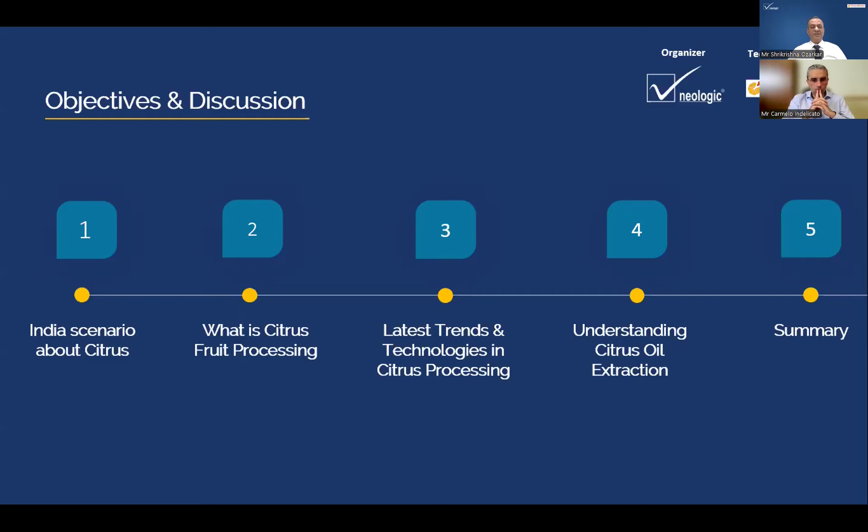So let's have an overview of the types and growing areas in India.

The typical Mandarin orange, technically known as Citrus reticulata, is the most common citrus fruit grown in India. It is generally known as Santra in India and is native to Southeast Asia. It is a rounded, usually thorny evergreen shrub or small tree that can grow up to 15 to 25 feet tall and produces fruits up to 3.5 or 4 inches in diameter, resembling an orange.

Sweet orange, also generally called Mosambi, is another typical type of citrus fruit. Oranges are known to be sweeter than other varieties, Kinnow has a more sour taste, while Mosambi has a mild sweet taste in nature.

This citrus orange occupies around 40% of the total area under citrus cultivation in India. The most important species are the mandarin, Citrus reticulata; sweet orange or Mosambi, Citrus sinensis; and acid lime, Citrus aurantifolia. These share around 41%, 23%, and 23% respectively of all the fruit produced in the country.

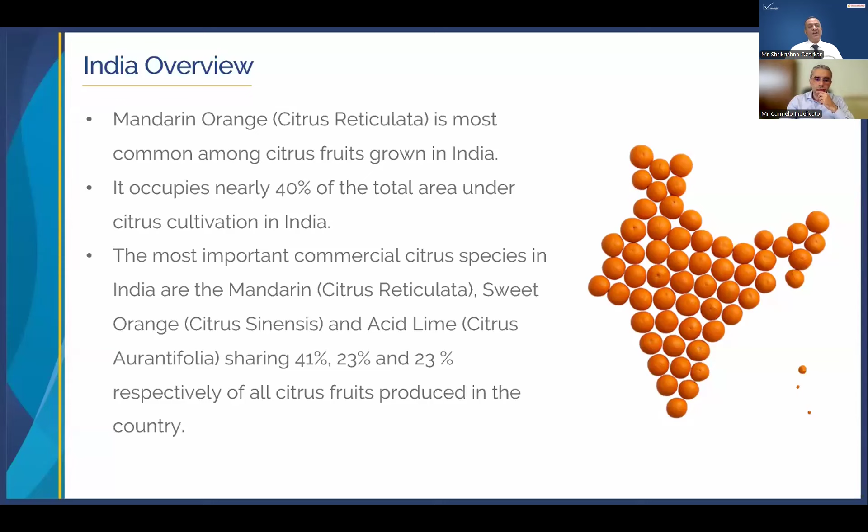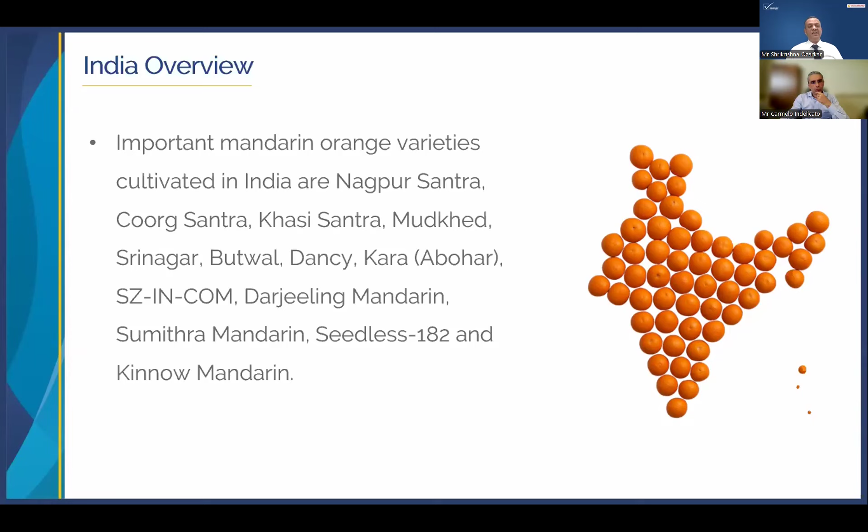The important Mandarin orange varieties cultivated in India include Nagpur orange or Nagpur Santra, the most famous variety in India, Coorg Santra, Khasi Santra, Mudkhed, Srinagar, Butwal, Dancy, Kara from the Abohar, Punjab area, and SZ-IN-COM, a typical variety developed by NHB, the National Horticulture Board, known for its improved plant growth, yield, and fruit quality. Then there's Darjeeling Mandarin, Sumithra Mandarin, and Seedless 182. These are some of the varieties typically grown in India.

Kinnow is also one of the citrus fruits grown in India. It is more largely cultivated in northern India, and Punjab holds the maximum share in Kinnow Mandarin producing area in the country. Other states include Haryana, Rajasthan, Madhya Pradesh, Himachal, and Jammu and Kashmir.

Kinnow is a high yield Mandarin hybrid, scientifically Citrus nobilis crossed with Citrus deliciosa, known as Citrus reticulata blanco. This hybrid citrus fruit offers several advantages over regular oranges. It is known for its higher calcium content, said to have 2.5 times more calcium than other citrus fruits typically found in Indian varieties, and it is good for heart health and cholesterol balance. Additionally, Kinnow is an excellent source of vitamin C and dietary fiber.

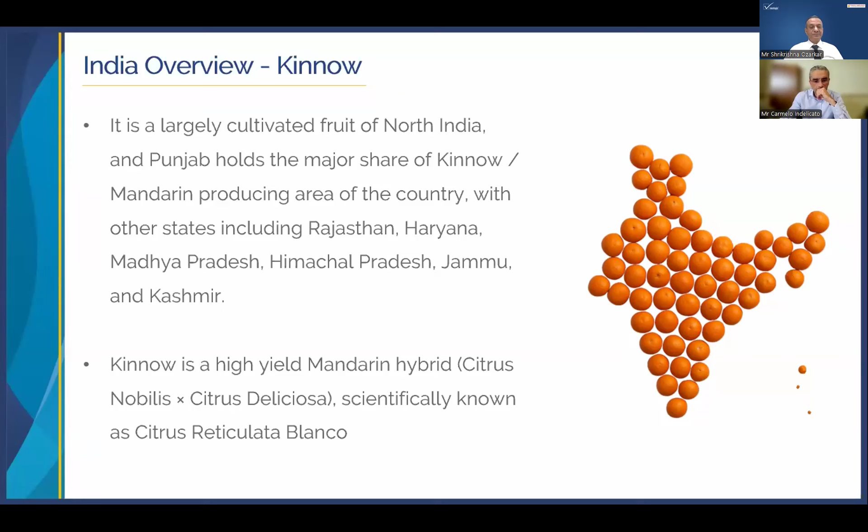You can see citrus growth all over India, but the north-eastern region is called the citrus belt of India, a very upcoming region in citrus processing, which will have a lot of fruit processing or citrus processing plants in the coming years, having a remarkable diversity in citrus species. This belt comprises Assam, Meghalaya, Arunachal Pradesh, Manipur, Nagaland, and Mizoram. This region has 52 varieties comprising 17 citrus species and 6 hybrid species.

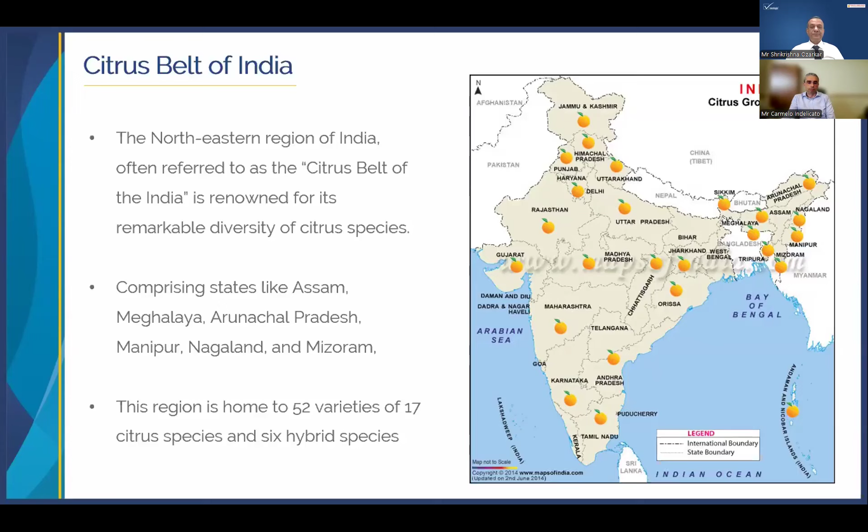This is the statewide production and productivity of citrus. This data has been taken from the National Horticultural Board and Ministry of Agriculture, Government of India, relating to 2021-22, so there will be updates in the coming years. This gives the area of plantation, production, and productivity in metric tons per hectare. Madhya Pradesh has one of the highest productivity figures, along with Telangana and Karnataka, in metric tons per hectare.

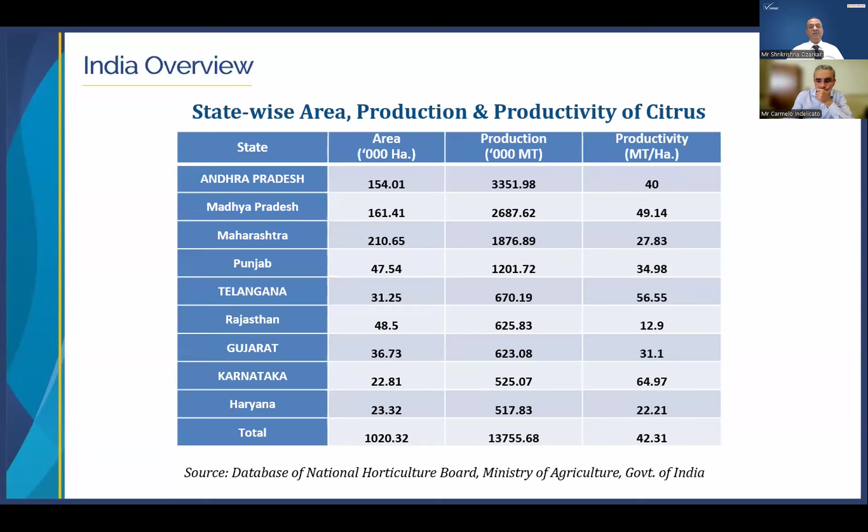These are state-wise growing belts. Like we typically say Nagpur Santra or Nagpur Orange, Maharashtra has the region of Nagpur, Akola, Amravati, and Wardha, the typical belt where most oranges are grown. In Rajasthan, we have Jhalwad and Kota. In Karnataka, we have Chikmagalur, Kodagu, Hassan, Bijapur, Gulbarga, and Bagalkot. In Madhya Pradesh, we have a couple of districts, along with Assam, Nagaland, Mizoram, Tamil Nadu, West Bengal, Orissa, and Meghalaya. And as mentioned for Kinnow, Punjab and Abohar have the maximum area where Kinnows are grown.

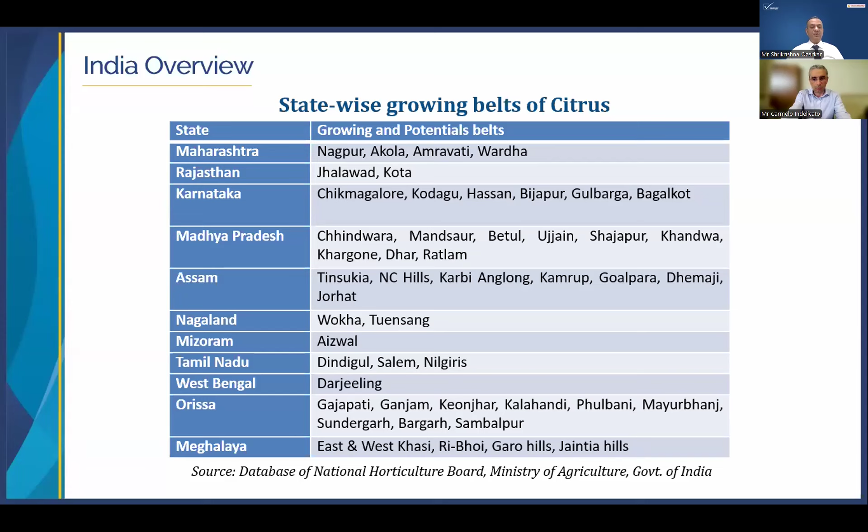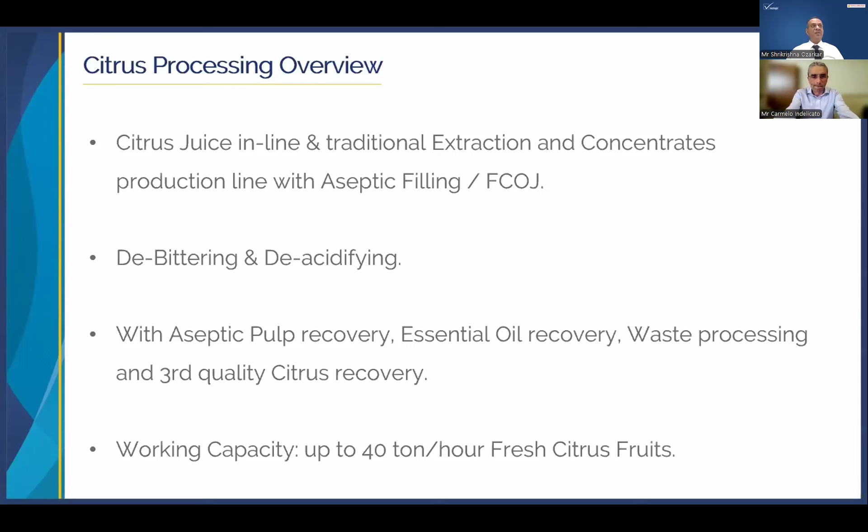So let's try to understand what citrus fruit processing is. Citrus fruit processing typically involves juice extraction followed by juice concentration. This juice concentrate can be aseptic juice, ACOJ, aseptic concentrate orange juice, or FCOJ, frozen concentrate orange juice. Then we'll understand debittering or deacidifying in citrus processing, pulp recovery, essential oil recovery, waste processing or third quality citrus recovery. We'll also understand the pulp wash system, and these systems can run up to 40 tons per hour.

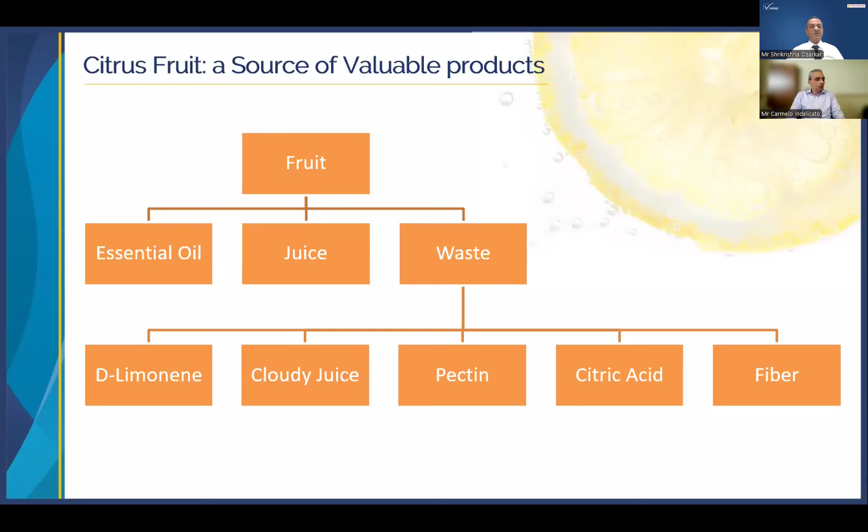The citrus fruit is a source of valuable products, such as essential oil and juice concentrate. The peel waste is also used in cosmetics, so there are many applications from the orange peel or orange peel powder. Then there's D-limonene, cloudy juice, pectin created from the fruit peels, citric acid, fiber - all these products we will be discussing again at the end.

Let's try to understand the typical process flow. We will have the fresh citrus receiving and storing. Storing because the receiving of citrus may be continuous or not, and we should have a buffer in order to feed and run the machines continuously. Then fresh citrus distributing - distribution to conveyor, distribution to grading - should be constant and proper.

Then we will understand about rasping machines for juice extraction, oil extraction, and also inline juice extraction and refining. We will have traditional juice extraction systems and refining sections. We will understand juice stabilization, blending or debittering or pulp addition, and deacidification.

We'll understand how the automation works in the entire system. What is the concentration section - how you are going to concentrate the orange juice or citrus juice. Then how this juice is going to be filled, whether aseptically into aseptic bags, or as a frozen orange concentrate juice. Then pulp recovery and aseptic packing section.

What is going to happen in the pulp wash, whether it should be 2-stage or 4-stage, and how we can value add with the pulp in the entire juice process. We'll also cover essential oil recovery, an important aspect of any citrus fruit. Then waste collections or third quality juice recovery. And of course, any food processing plant requires a CIP station - cleaning in place - we'll understand this process and why it's required.

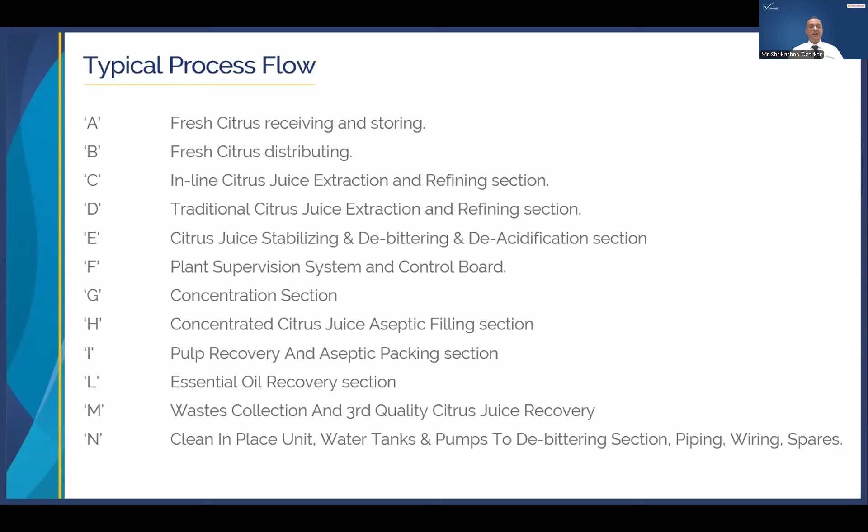So the typical process flow: we will receive the fruits with due quality analysis done. We'll analyze the size, initial brix, initial acidity of the fruit, juice yield, defects - all this analysis will be done. Then this goes for vehicle weighment after receiving and QA analysis. The vehicle will be weighed and go on to the unloading ramp for either dry unloading or wet unloading.

Then sorting and grading - we sort and grade the fruits, removing defected fruits, small fruits, leaves, straw, stems, stones, whatever comes along with the fruits. Then these will be stored either in bins or silos, or can go directly for processing.

Then we have the fruit washing - there could be one or two stations depending on requirement. After washing and brushing, fruits go for sorting and grading, typically for physical damage and foreign matters. Then they go for sizing, because the cup extractors typically require different sizes of fruits.

Then extraction by cup extractors for juice, oil, and waste. Then it goes to a multiple effect evaporator - the number of effects depends on the quantity or capacity being processed. Then there's pulp separation from the juice through the centrifuge. We'll also understand debittering, followed by pulp addition, the final evaporation stage, and blending and packing - this is all what we are going to cover.

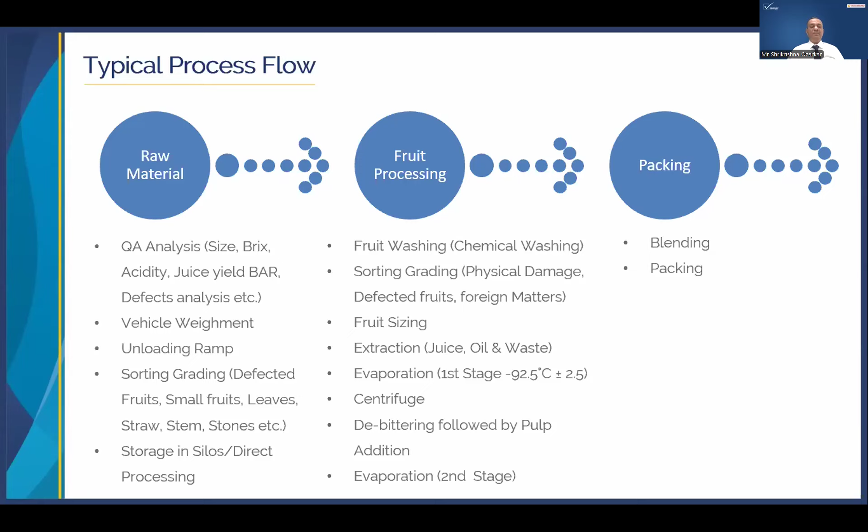So this is a typical process flow for the entire citrus processing line. I request Carmelo to explain this onwards. Over to you, Carmelo.

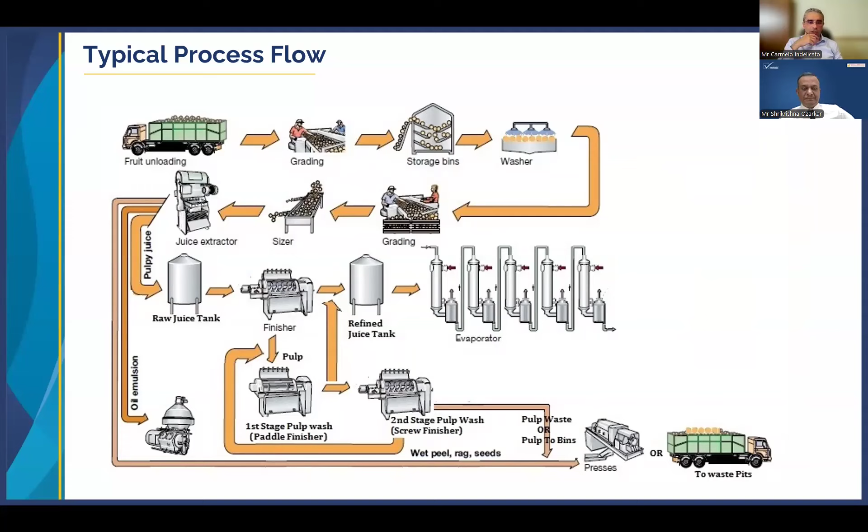We have here a typical schematic layout of what a complete citrus plant should look like. You have a first section, fruit unloading - the fruit will arrive typically in trucks to the plant and be discharged. We will later see if it's a wet discharge or dry discharge. Then there's a grading section, a balance bin to stabilize the flow inside the production area, washing of the fruit, grading, sizing, juice extraction, and then juice finishing.

Later on, if you're producing concentrate juice, you have the evaporators. Otherwise, if you're producing not-from-concentrate juice, the juice will go to a different path. Regarding the oil, the emulsion and frit will go through a finisher and then through the separators.

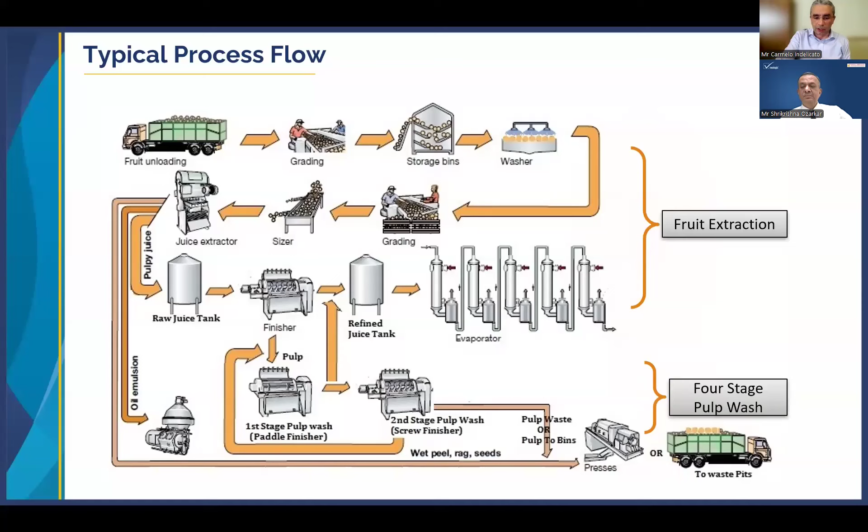You see the first part is the fruit extraction and then the refining of the juice and the pulp. This here is a very simple and schematic flow chart of the process, only regarding the extraction section of the oil plant. As I told you, the fruit will arrive in trucks, it will be discharged, washed, brushed, and then routed to the actual extraction section of the plant.

In our line, we install dedicated oil extractors, particularly when processing hard fruit like oranges, lemons, grapefruit, or lime, in order to enhance the yield of the extraction of essential oil. So the fruit will be routed into our polycitrus oil extractor.

From this machine you have two outlets. One is the mixture of water, essential oil, and small particles of peel that will go to the oil recovery unit. The second outlet is the whole fruit, still firm, that will go to the juice extraction section.

The fruit will be sized and then routed to our new cup juice extractor. Here you have four different streams. The first one is whatever oil is left in the fruit from the polycitrus, which you can recover here, and this stream will be joined together with the emulsion coming from the polycitrus.

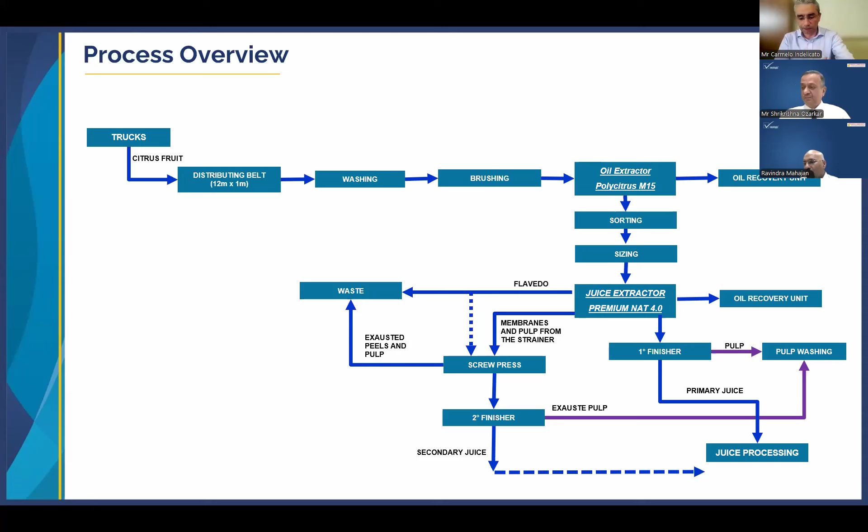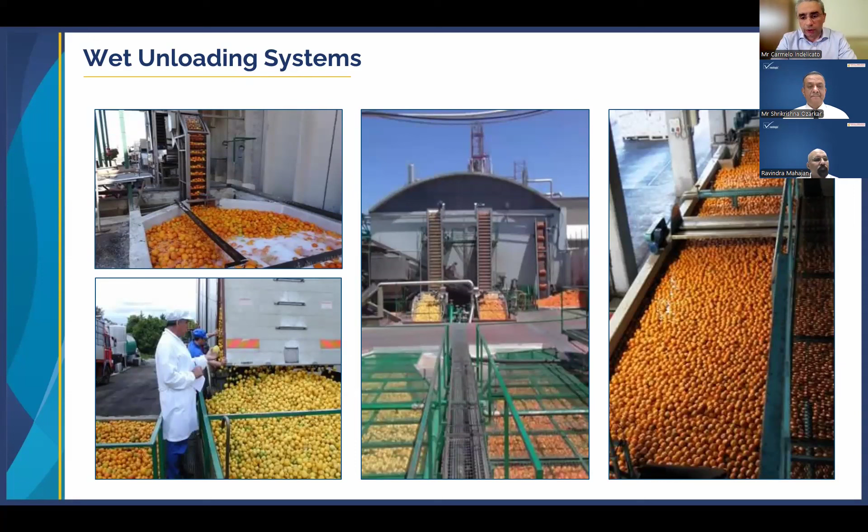Here you can see some examples of a wet unloading system. The trucks will unload the fruit into these pools with water. You might even use chemicals to properly clean the fruit, and then the fruit is ready to go inside the production area.

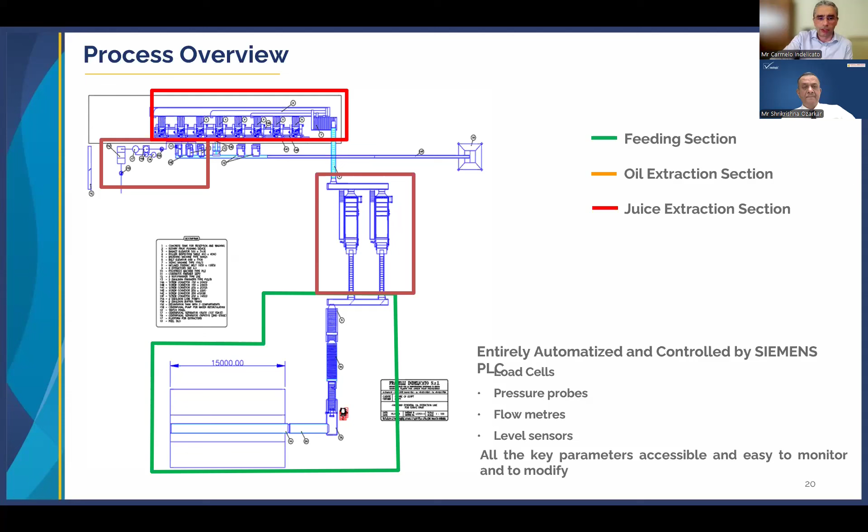You have three main sections. In green, the receiving and preparation area. In orange, the oil extraction section with the two polycitrus machines, the finishers, and the centrifuges. And in red, the juice part with all the juice extractors, the sizer, and the finishers for the juice.

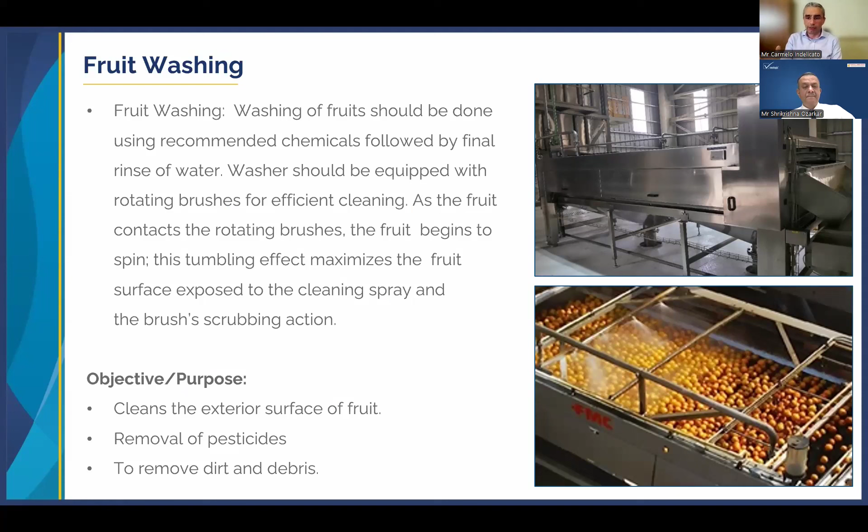Here you can see an example of a brushing machine. Typically these machines are equipped with several arrays of nozzles in order to give you the possibility to use not only fresh water but also at the same time chemicals to properly wash and rinse the fruit.

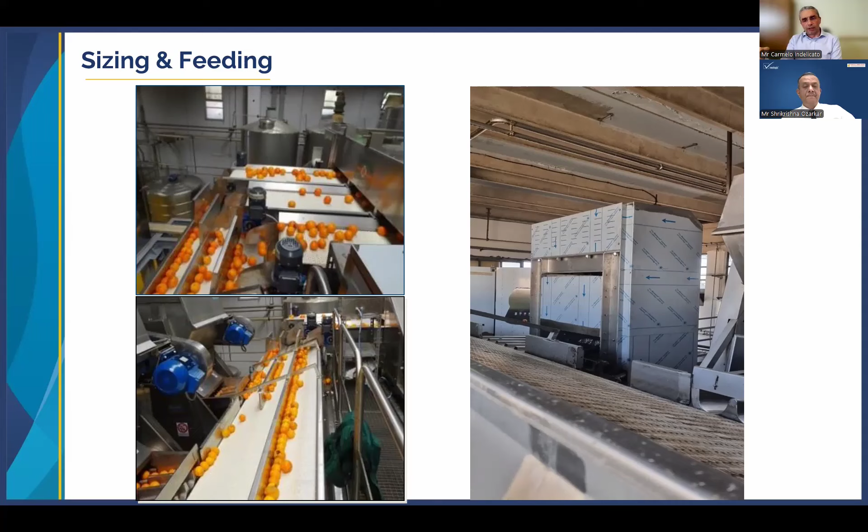Here you can see other examples, and then this is where the sorting and sizing of the fruit happens. Once you split the fruit by size, each size is then routed to the proper cup extractor.

Now let's see what are the latest developments in juice processing technology. As you probably all well know, there have been on the market for many decades a lot of manufacturers who build this kind of machine, this kind of cup extractor.

This machine was originally developed in the US in the late 40s or beginning of the 50s. Ever since, many other companies have taken this technology and made their own version, without bringing in any major innovation. What we did is take a different approach.

Although the working principle of the machine is the same as the others, with interlocking cups that squeeze the fruit, we tried to greatly simplify the architecture of the machine. This machine has fewer mechanical components than the others, which means easier operation and less maintenance for the end user.

Very importantly, given the peculiar architecture of the machine, there is no risk of contamination of the product with lubricants, because all other manufacturers have very complicated mechanical transmissions to drive the motion in their machines, and these components require lubricants. We simplified the machine a lot - I can go into details later if you want - and this allows us to reduce or completely eliminate the risk of product contamination with lubricants.

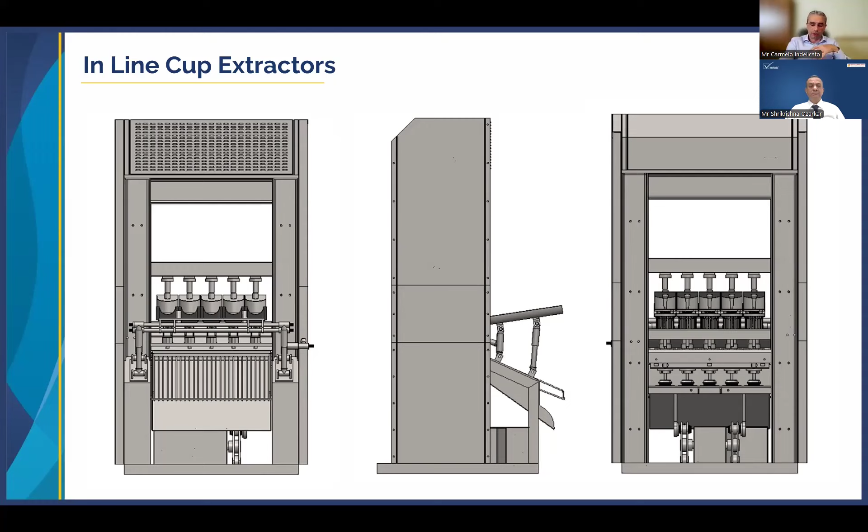The machine can run at 120 strokes per minute with 5 cups, which means 600 fruits per minute. It can extract the juice and also the essential oil, although given the cup technology itself, which is characteristic of this kind of machine, the yield in essential oil is lower than what you can get with a rasping machine.

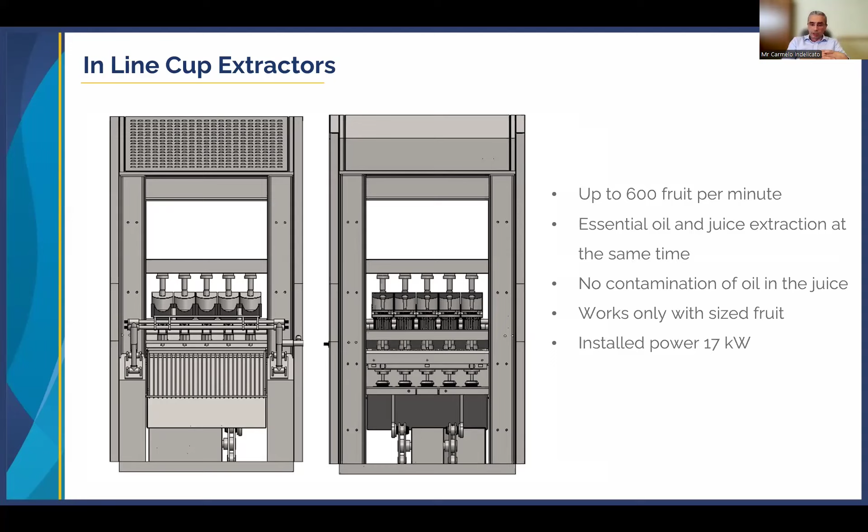The machine requires sized fruit to work properly and give the proper yield, and has an installed power of 17 kilowatts.

We are selling our machine, not leasing at the moment. It's entirely made of stainless steel. The CIP system is embedded in the machine, and it can be configured with different cup sizes, different strainer sizes, different mesh of the strainer, and different holes of the strainer.

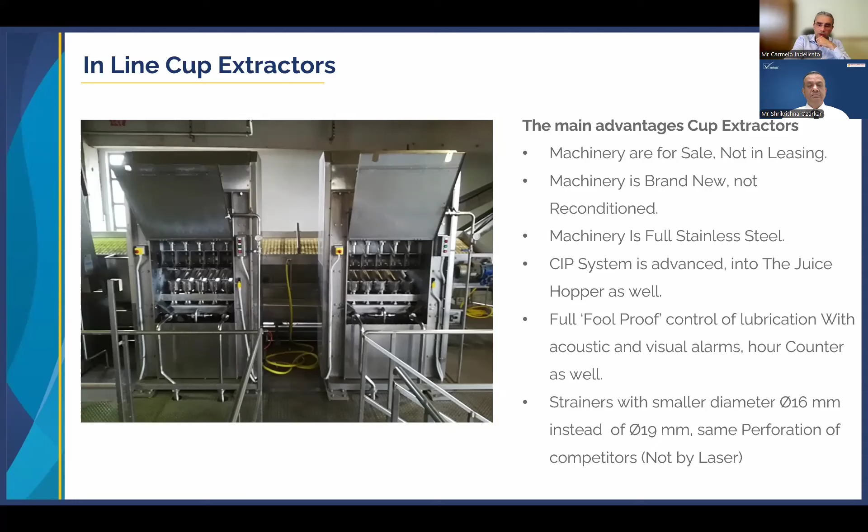This is the general working principle of the machine, common to any kind of cup extractor. The fruit falls into the lower cup, and the upper cup moves down and encounters the fruit. When it does so, it cuts two openings, one on the bottom of the fruit and one on the top.

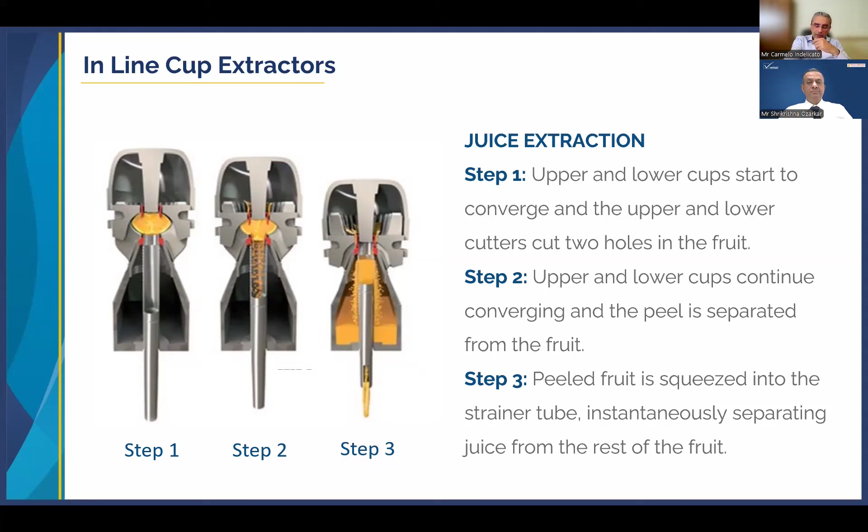By continuing to go down, the upper cup forces the juice into the strainer, and the juice is collected and combined with the juice from other extractors. The peel is forced into the annular region created between the upper cup and the upper knife, and during this operation, passing through this annular region, the oil cells are broken and the oil can be collected and further processed.

As I mentioned before, the outputs are the primary juice that goes to a juice finisher, and the emulsion of water, essential oil, and fruit that goes to emulsion finishers and then to the centrifuges. Then you have the peels, the flavedo, the rags and membranes, and the exhausted pulp, which can go to waste or to waste treatment processes downstream.

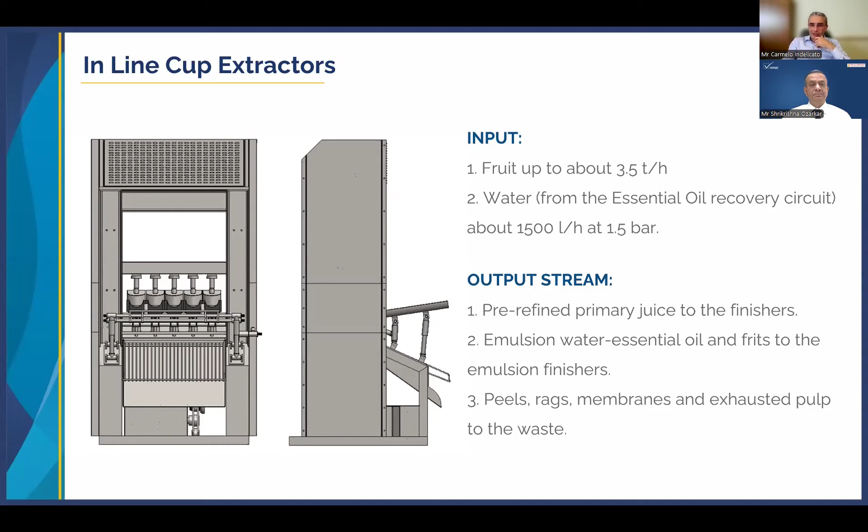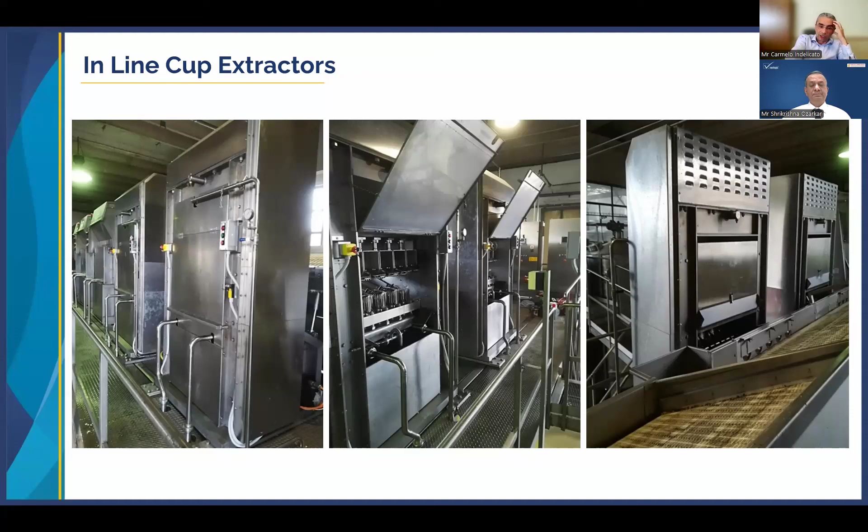After the juice is extracted, it goes into a finisher. We propose a two-stage finisher. The first stage is equipped with a mesh of about 1.2 or 1.5 millimeters. This allows you to recover from the first stage cells and pulp of good quality that can be sold as a product. The juice then flows into the second stage, which is equipped with a 0.5 millimeter mesh, and here it's refined to the desired pulp content.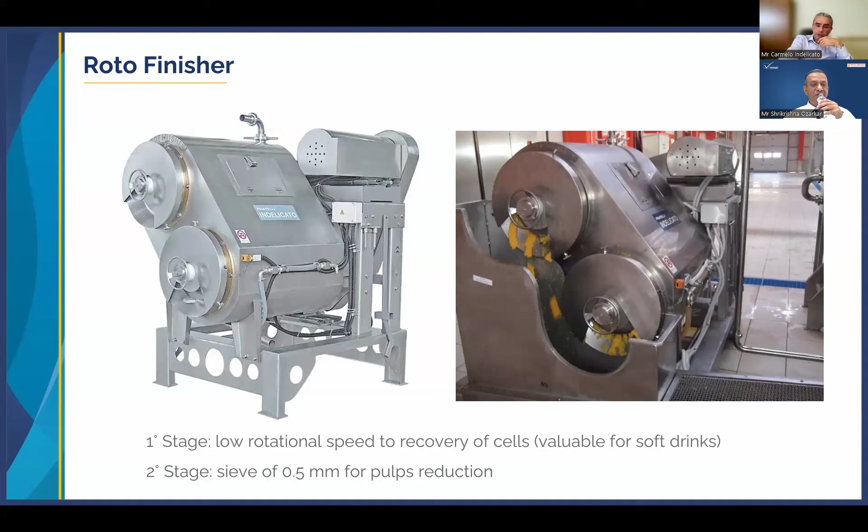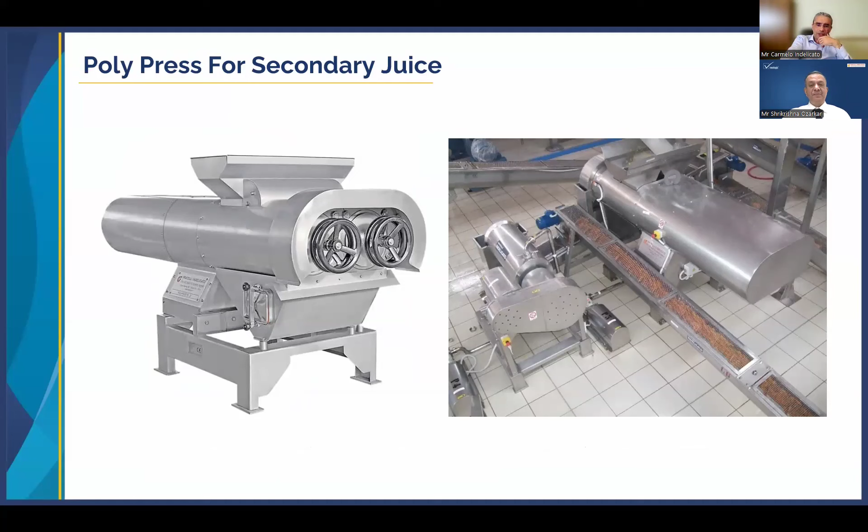An opportunity you have is to collect the pulp coming from the finisher, which still contains a lot of soluble solids, and try to extract these in order to increase the overall yield of your plant. This system is commonly called the pulp washing system.

We offer a 4-stage pulp wash unit, meaning 4 finishers working in a counter-current system. We propose 4 stages rather than 2 or 3 because this reduces the amount of water you need to add to the pulp in order to recover all the soluble solids still present in it.

Consider that the water to pulp ratio in a 4-stage system is on average 1.2 to 1.3. If you decrease the number of stages to 3 or 2, this ratio can go up to 2. So with 4 stages, for 1 ton of pulp you need to add 1.3 tons of water, while with a 2-stage system, for 1 ton of pulp you need 2 tons of water. This means higher water consumption, less sustainability, and the need for more or bigger tanks.

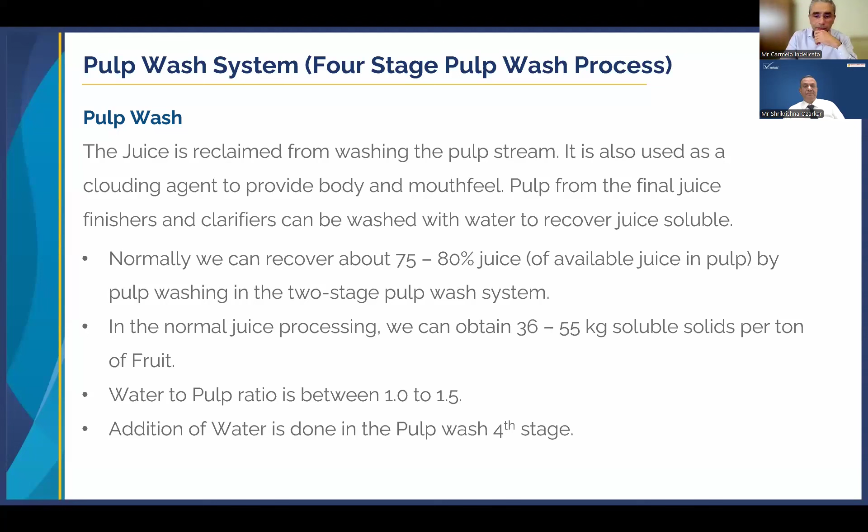From this last finisher you have two outlets: one is the exhausted pulp that goes to waste, and one is the liquor that enriches in brix as it moves from roto finisher number 4 up to number 3, then number 2, and so on until it reaches roto finisher number 1, at whose outlet you get the strong liquor with about 5 to 6 brix that can go to the evaporator.

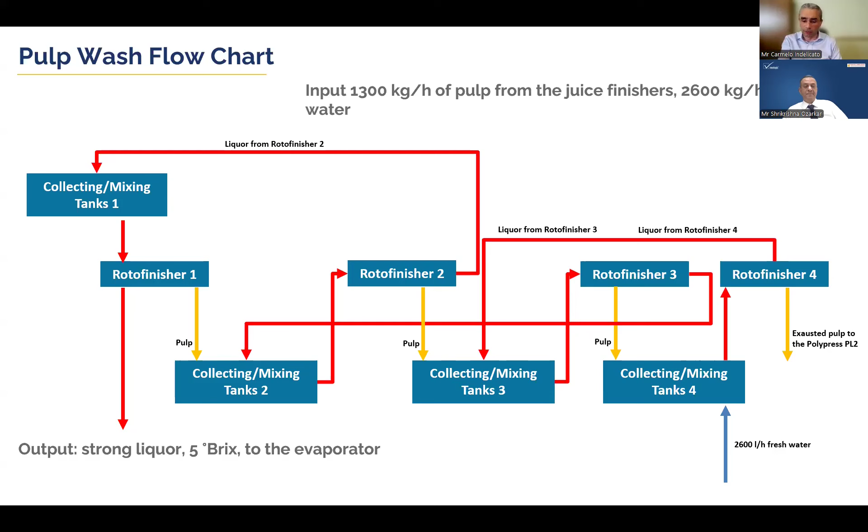I hand back to you, Parag. Yeah, thank you. While Carmelo was talking, keep the slides up. Yeah, sure. Can you see it? Not yet. Okay, yeah.

While Carmelo was talking about pulp wash and pulp separation, one important aspect in citrus processing is separation of high density pulp from the juice. This is typically done by a specific model of separator, which separates a continuous stream of concentrated pulp or high density pulp, a continuous stream of juice, and also the wastage. Other separator models may not be typically used in this application, so we choose and engineer a model depending on capacity and pulp content.

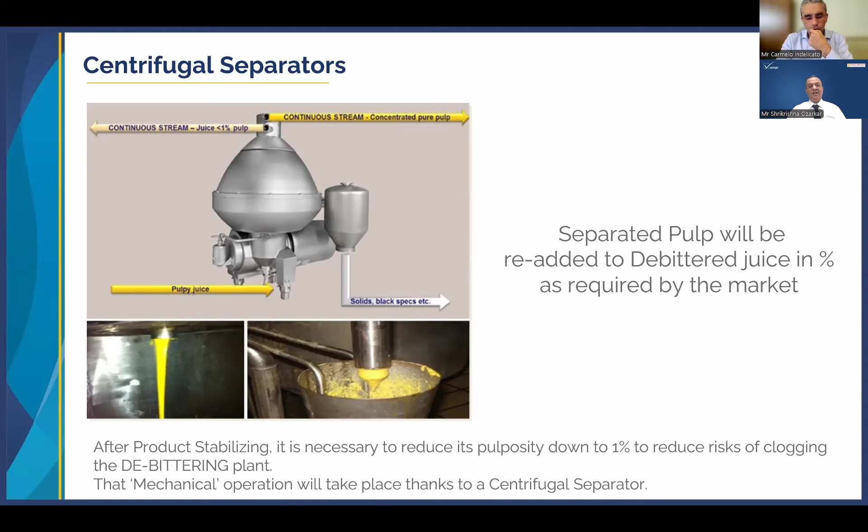Regarding debittering: the limonin content in citrus fruits gives you the bitterness. For acceptable bitterness, the outlet limonin content has to be less than 5 ppm, which is achieved by this particular system. It's an entire system in stainless steel, where the inlet could be as high as 15 to 35 ppm, and the outlet has to be maintained between 3 to 5 ppm for an acceptable level of bitterness in the juice.

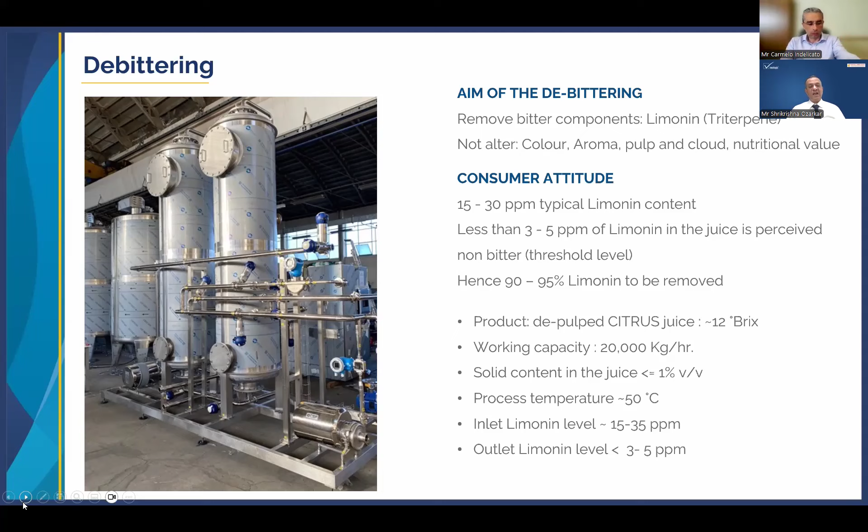Also, the pulp separated from the earlier separator, if sent directly into the debittering unit without separation, can clog and choke it up. That's why the pulp is separated first, and the lesser pulp content juice goes to the debittering unit for the debittering process, after which it continues for further processing. Next slide, please.

After this, we will have the evaporator. The pulp addition can be done prior to or after the evaporator, depending on what kind of pulp addition we are looking for. The evaporator could be multiple effect, with 1, 2, 3, 4, or even up to 7 stages, depending on the capacity. The concentration from the initial brix, maybe 9 to 12 or 13, can go up to 65, 70 brix. So based on the initial fruit level, the concentration will happen, and that will give you the capacity of the entire project or line.

This is a falling film evaporator, unlike the other tropical fruits we process like mango, guava, or tomato, which require forced circulation evaporators. This is using a thin falling film evaporator.

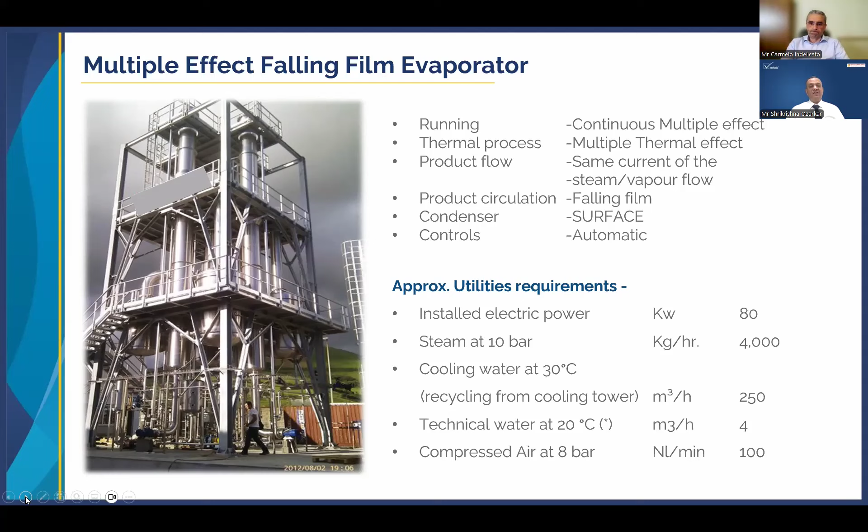This is a typical process flow of the evaporation, with the inlet juice brix between 8, 10, or 12, and the outlet brix maintained at 65 to 72, depending on what kind of concentration we are looking for. We won't go into detail on these stages because this is a niche technical topic, and covering it all would exceed our 45-minute scheduled time. So whoever is interested in the entire process flow, we can have a separate discussion on that.

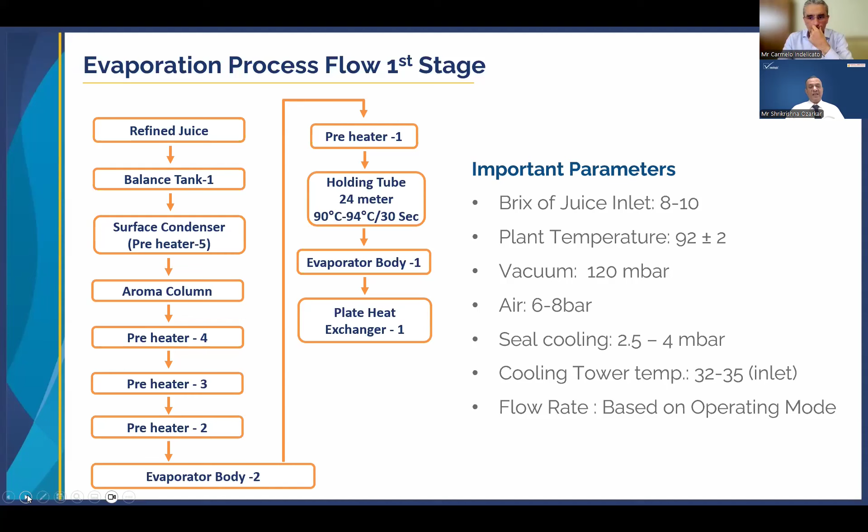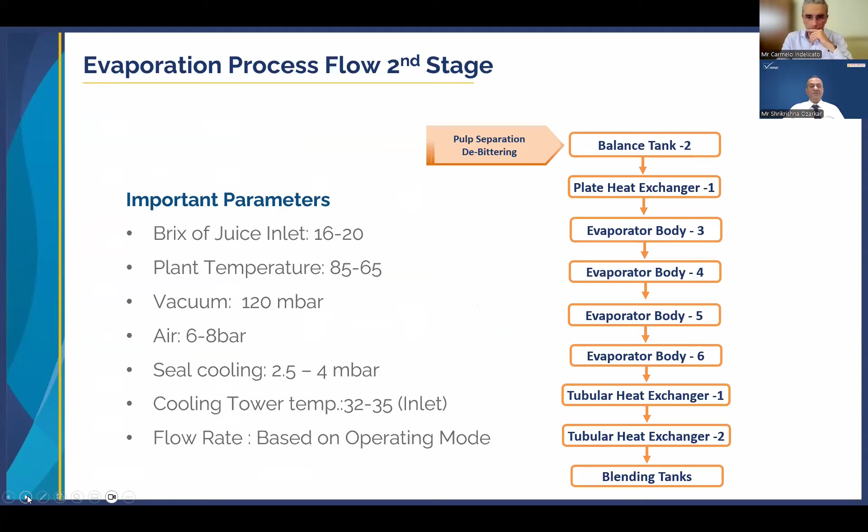Again, the second stage of evaporation comes after the pulp separation and debittering. All these stages can also be discussed in detail once we have sufficient time.

The concentrated pulp can go for aseptic sterilization if we are looking for aseptic concentrated orange juice, ACOJ, or it can go as frozen concentrated orange juice, FCOJ. Depending on the requirement, it can have the aseptic sterilizer and aseptic filler, which we will see in the next slide.

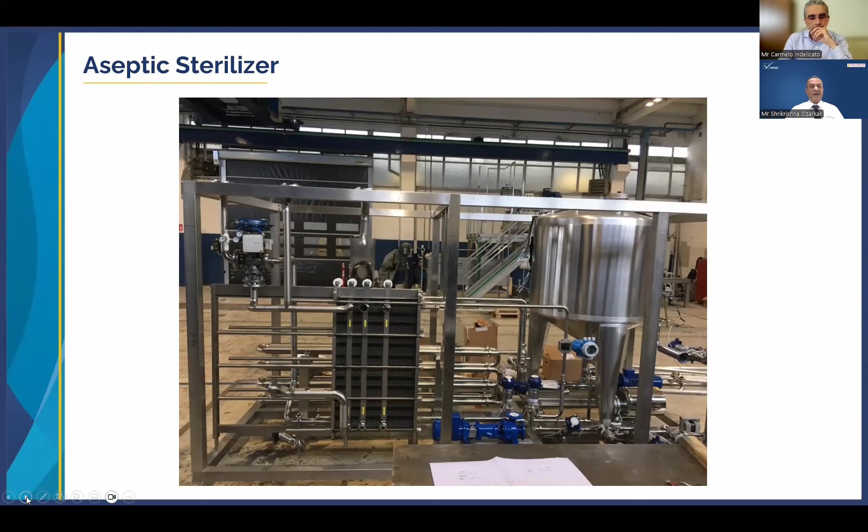The aseptic filling after aseptic sterilization is filled into aseptic bags, which can be 5 kg, 20 kg, or even 220 kg or 1000 kg, with a shelf life of 2 years.

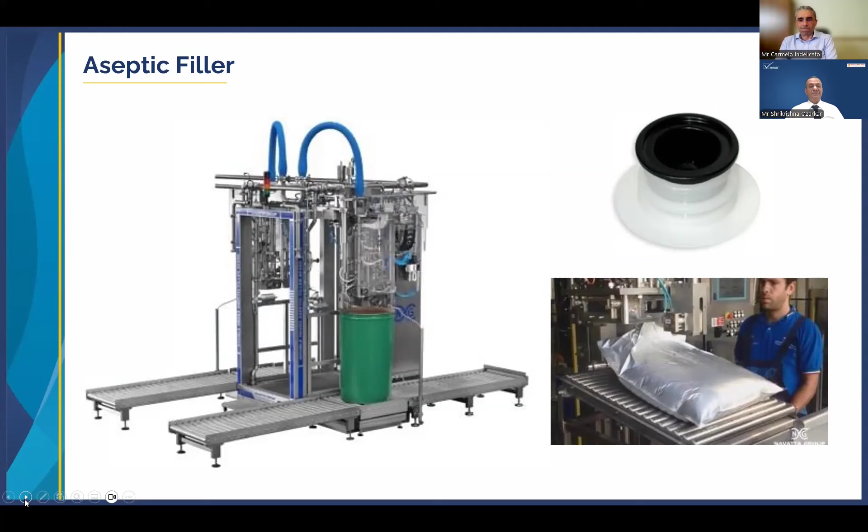There is a requirement of blending. Depending on the season and the time of processing, the pH level and acidity can vary from fruit to fruit. In order to supply a constant quality of concentrated orange juice with a typical acidity level maintained, we need to blend, and that is why the blending section is also required.

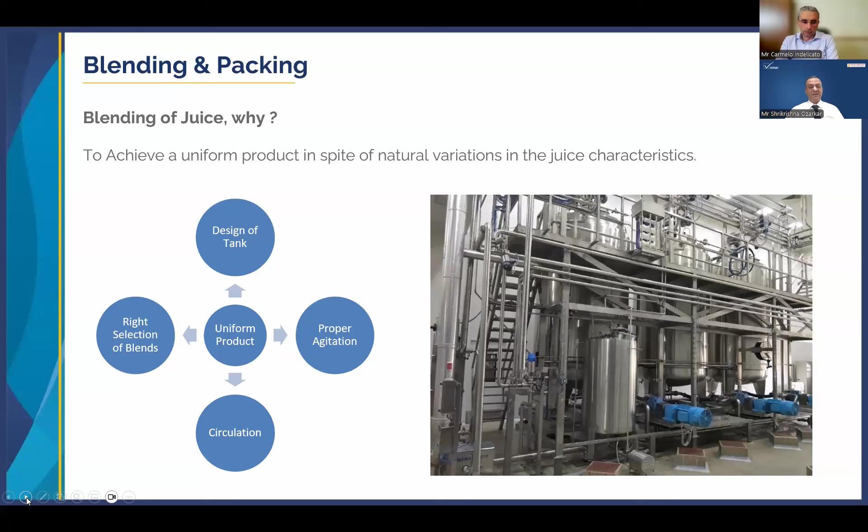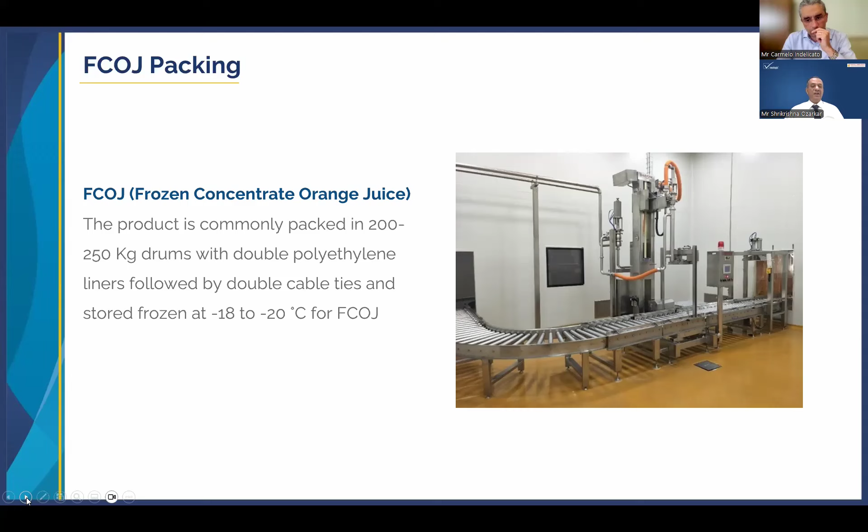Peel oils are also an important aspect, in fact one of the most important aspects in the entire citrus processing. Carmelo, you can cover this particular topic for the next few slides. Yeah, okay, thank you.

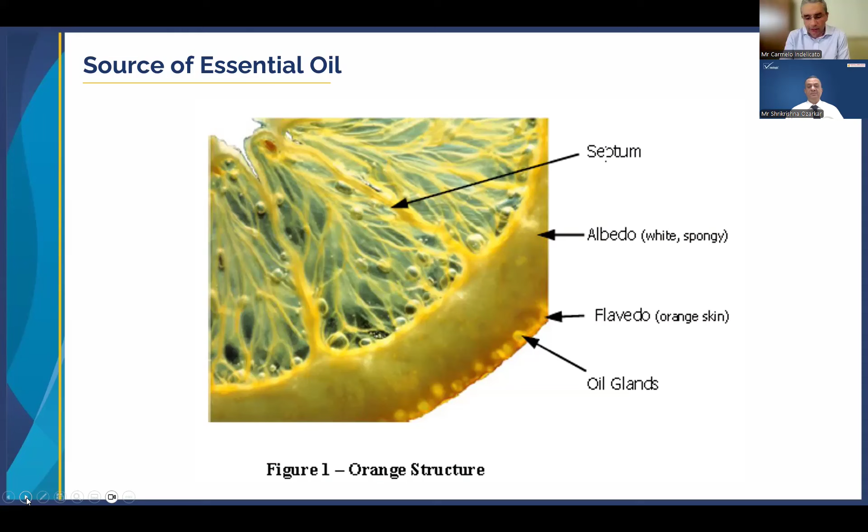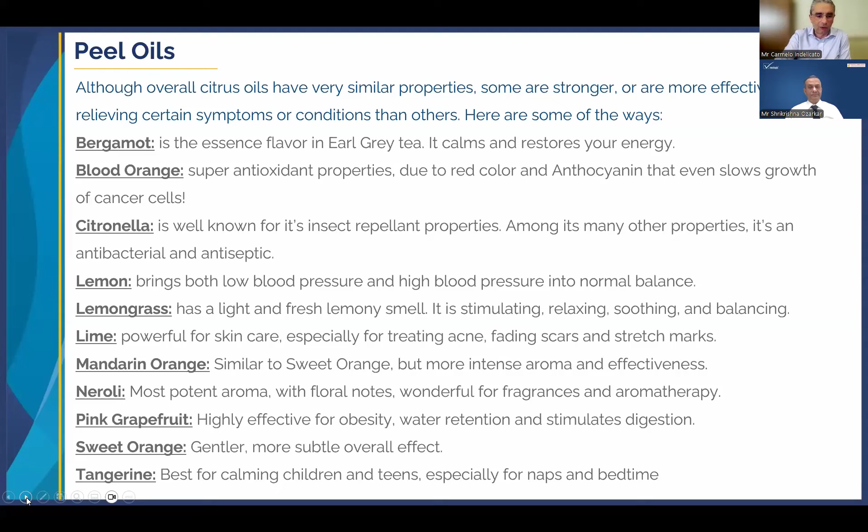The traditional and standard process flow for recovering this oil is already well known. You remove the oil from the fruit using whatever technology you have at your disposal. Then you have this mixture of water, essential oil, and peel particles that will go through a finisher, then into a tank that feeds the first centrifuge. This centrifuge will separate most of the water from the oil. This enriched emulsion, which is mostly oil, will go into a second centrifuge that makes the final separation and gives you the pure oil that goes to the storage or winterization unit.

The water that comes out from the first centrifuge will be pumped into a decantation tank, where it will stay for a few minutes in order to settle down all the remaining solids, and from there it is pumped back to the extractors.

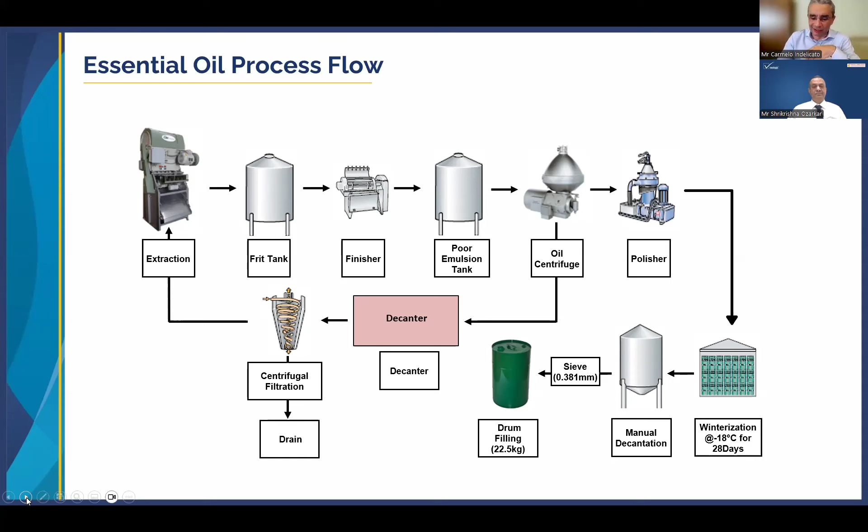So it's a semi-closed system. The water is continuously recirculating during the operation. What can happen is that after a few hours of operation, the pectin level in this mixture will start to increase too much, and this will reduce the efficiency of the centrifuge. To avoid this, you drain a little bit of water from the decanter and add back some fresh water, typically up to 20-25%. That's why I was saying it's a quasi-closed system.

This is a schematic flow chart of our current system. You have both technologies working in cascade. You have the Polycitrus M15, the dedicated oil extractor, which is where the main oil removal happens. With this machine, you can take out up to 85-86% of the total oil content of the fruit.

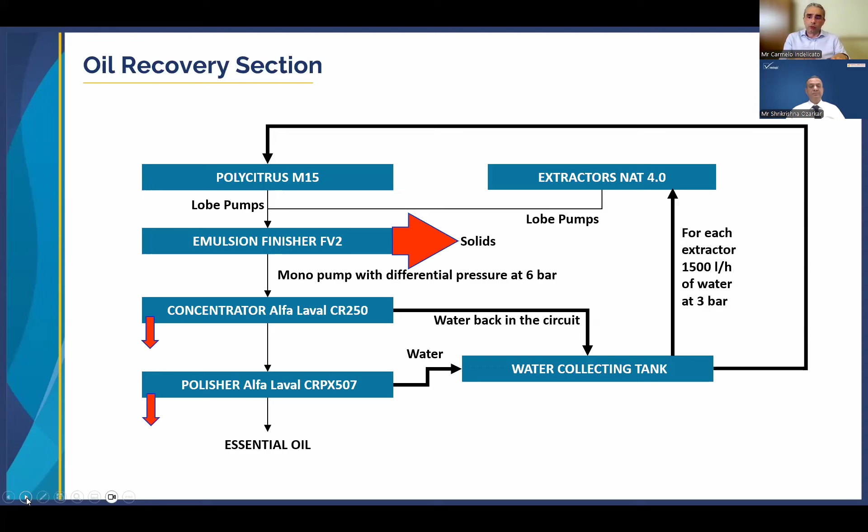Then the mixture of water, essential oil, and frit will go to the emulsion finisher. Here we get rid of the solids, and then we hand over the product to the separators, the vertical high-speed separators. The water will go back to the extractors. Whatever oil is left in the fruit - maybe you don't want to remove it completely in the Polycitrus because you want to preserve some firmness - that oil can be recovered in the cup extractors. The emulsion of water and essential oil will be joined together with whatever is coming from the Polycitrus M15.

This is our oil extractor, the big one in our range, the M15. The capacity of this machine is 10 tons per hour of lemons or lime, and 20 tons per hour of oranges or grapefruit. Underneath the machine is the oil finisher, the emulsion oil finisher.

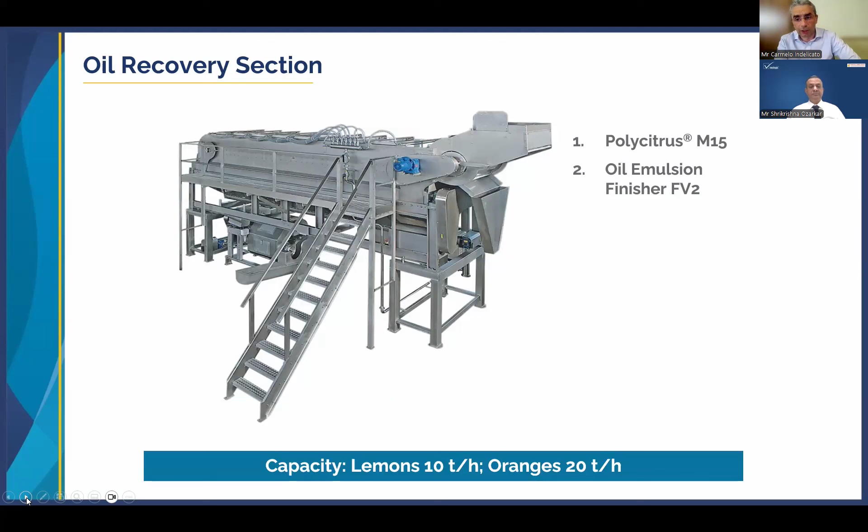These are some pictures of the inside of the machine. The key elements are the 6 counter-rotating rollers, which are coated with some rasping sheet. These rollers actually mechanically scratch the surface of the fruit, releasing the oil. Then there are paddles that move the fruit forward in the machine. The 2 key parameters of this machine are the speed of both the rollers and the paddles. According to the fruit hardness and ripeness, you adjust these 2 parameters to obtain always the optimum amount of rasping on the fruit.

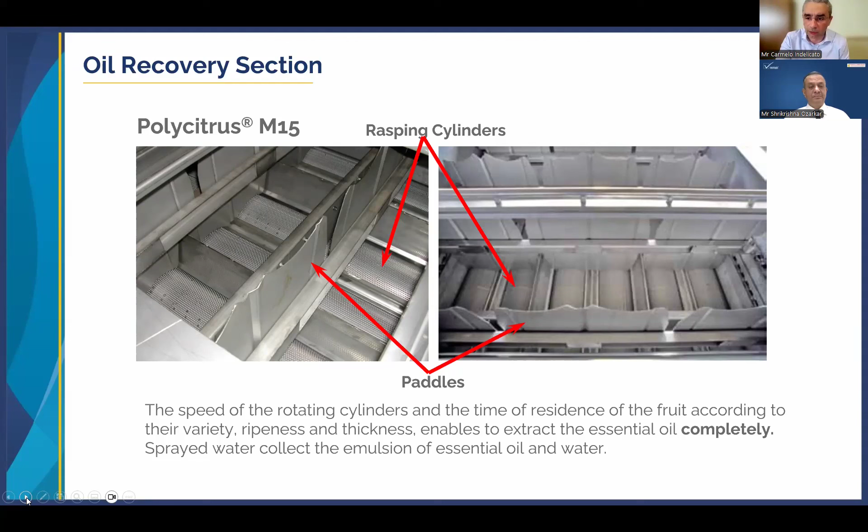These are some pictures of the fruit inside the machine. Once you have this mixture, it falls by gravity into this finisher, and this finisher removes the solids from the emulsion. You can see on the right-hand side the waste coming out of this finisher - it looks like crumble bread.

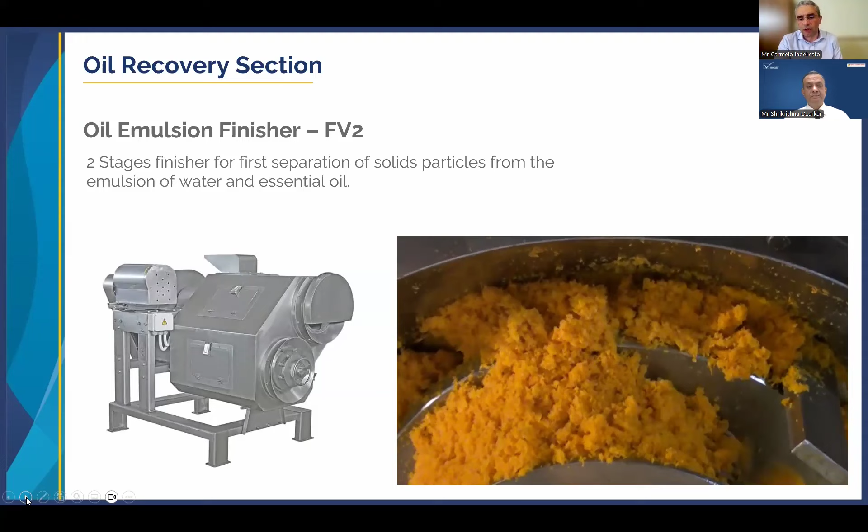This slide explains how the oil is extracted in the cup extractor. By the way, in case of soft fruit, or easy-peel fruit like some mandarins, you cannot use the Polycitrus M15 because the risk of destroying the fruit is too high. In that case, you bypass those oil extractors and go directly into the cup extractors and let them recover whatever oil they can.

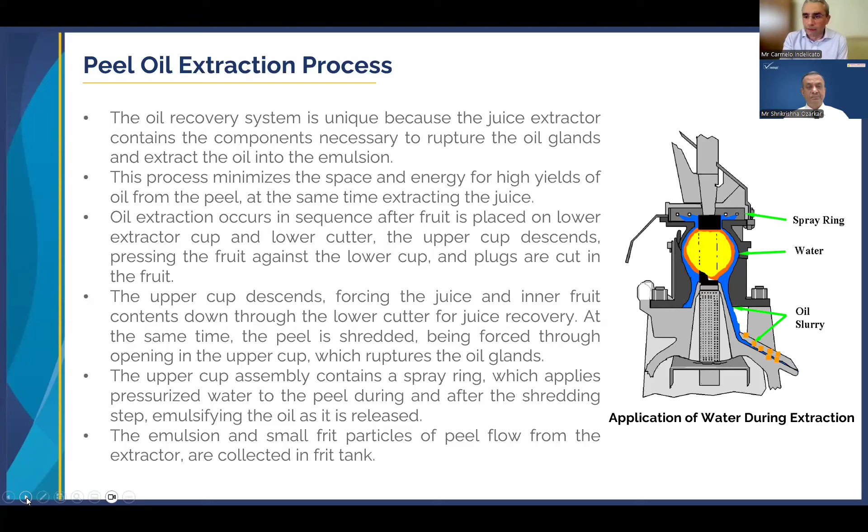Also here you have some water which is injected into the upper cup, and this water will wash the fruit while the peel is going up between the knife and the teeth of the cup. This water will then collect the oil and go down to the finisher. After the finisher, you have, of course, the two high-speed vertical separators.

You can process that and extract several byproducts. First of all, you can extract D-limonene, which is basically essential oil. In those peels, you still have some quantity of essential oil that can be extracted. This D-limonene is a natural substitute for very polluting substances like benzene or toluene, so there is a huge market for this particular product.

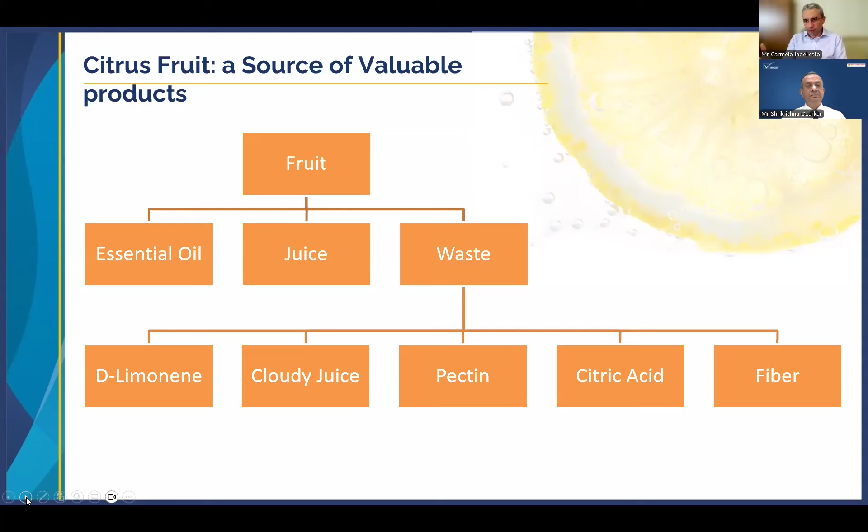The very interesting thing is that the technology we developed allows you to obtain all these products using some innovative dryers with an energy recovery system embedded. This allows you, with the same amount of energy used to make your concentrate, to also obtain these streams of value. This is a solution we developed in the last couple of years. We have some projects going on with this, and at the moment, I think we are the only one able to provide you a turnkey solution of this type.

So let's have a recap on what we have covered till now. First we understood the different varieties India has, different regions where citrus fruits, mandarin, Indian orange are grown. In fact, we also covered the kinnow. So understanding the types and varieties of typical orange or citrus fruits grown in India, the areas where they are grown, and the productivity per hectare output, we also covered in a few slides.

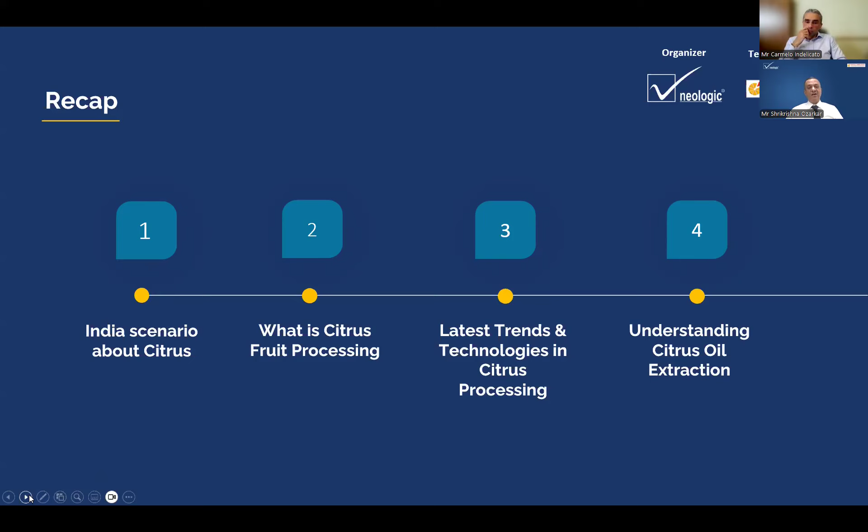We understood why we should process and how we should process citrus fruit. Then we also understood the latest trends and technologies in citrus fruit processing. And then we covered citrus oil extraction, which is a very small percentage but very important aspect of any citrus fruit processing. So this is what we have covered till now. Next slide, please.